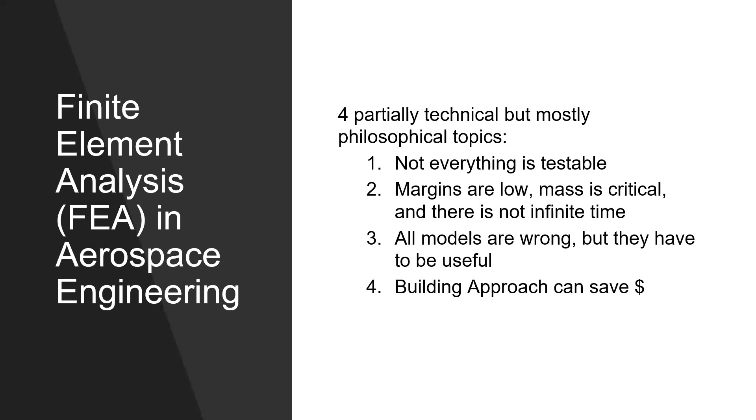So yeah, not everything's testable. Specifically, not all flight hardware is testable. So just running a quick thought experiment: if testing was incredibly cheap and fast, would we still use finite element analysis? I mean, it's a useful thing to think about because there's so many different cases.

If you think about a piece of primary structure on a launch vehicle, for example, or on an aircraft wing, and think about that piece of flight hardware throughout its entire life. You have manufacturing, you have transportation, you have flight cases, you have flying in rain, flying in hail, flying in Abu Dhabi, who knows? It's almost impossible to come up with a complete test campaign that looks exactly like everything you want to prove, including factors of safety and everything else that your regulators want to see in a test. Even if it was incredibly cheap and fast, it's almost impossible.

It's also generally true that physics always wins, and we can't always impose the right test like you fly conditions. So what do I mean by test like you fly? On the ground, you're not able to replicate every single thing that happens in flight. You have a test fixture that your hardware is attached to that is different than what you're flying to. You're not always able to apply hundreds of degrees to your flight hardware under load. So this is inherently a limitation that everyone faces.

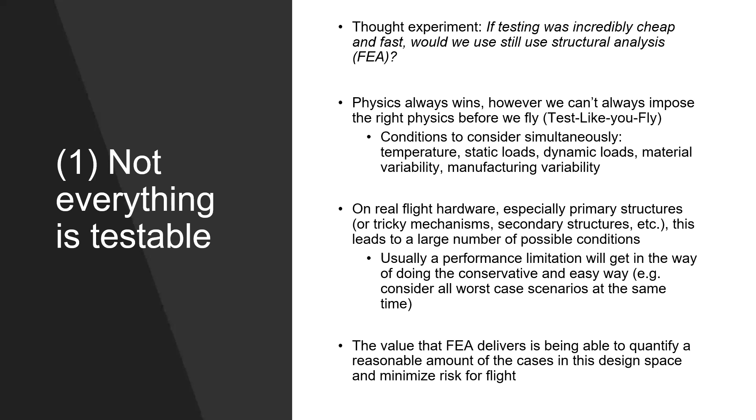Yeah, so following, not everything's testable. As I mentioned, if we had huge mass margins, we would just overcompensate with more material and make the part heavier and de-risk failure. But generally we can't do this. And even if we could, with really high mass margins, reality typically throws a lot of things in your direction, like lack of money, lack of time, especially schedules and cost always get in the way of actually making these things feasible. So FEA is generally the most economical way to make sure that the flight hardware is working.

Obviously, a really big exception here is flight hardware that requires super complicated analyses where it's difficult to ground models. My thrust chamber assembly is a decent one, though I would argue we kind of know how to do that. But I've worked on a few different designs. I don't know if anybody's familiar with the Falcon launch vehicle, the grid fin structure. That's extremely difficult. You have really weird aerodynamic loading, very high temperature gradients, and we didn't have a good way to get flight data back. So there's some scenarios where you want to tailor your risk posture and make sure you have the right approach, or you just decide to go test something to reduce risk.

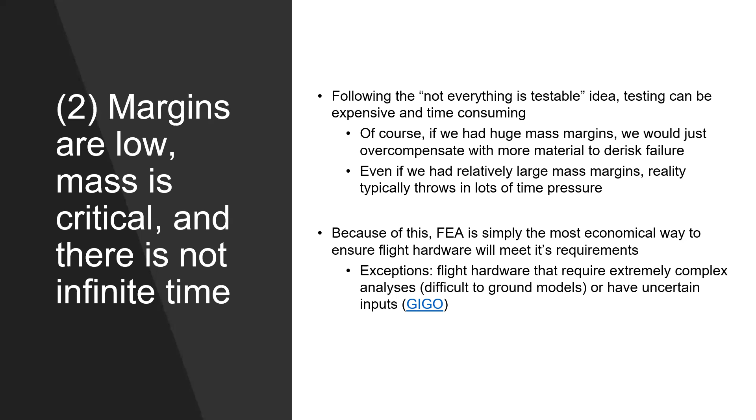Any other questions? And I think you're gonna talk about the building block approach, no? Yeah. Yeah.

So FEA is generally a useful thing in aerospace, no matter what you do. As a design engineer, you can just work a lot faster. As a stress engineer, it's your job. If you're a program or product lead, you're going to use this to de-risk flight hardware that your team's designing. So when I'm working with my team, I'll generally be asking for finite element analysis models to de-risk possible failure modes that I think are going to cause us problems in the future, or to optimize. And then as a systems engineer, this is crucial for your compliance deliverables. It might eliminate some testing you need for compliance later down the road.

And then there's some pretty cool things you can do with FEA, which I don't see used very often in my industry, like boots on the ground, except for R&D maybe. These are three pretty key ones. The second one is quite common: vehicle level dynamics models.

I don't know if you've talked about coupled loads analysis, if that's a topic here, Vinay. Do you talk about CLA at all in this class, or dynamics? No, but we did cover dynamics, and we just covered mass matrices and stiffness matrices. But you can take a minute to explain it. I think they'll enjoy that.

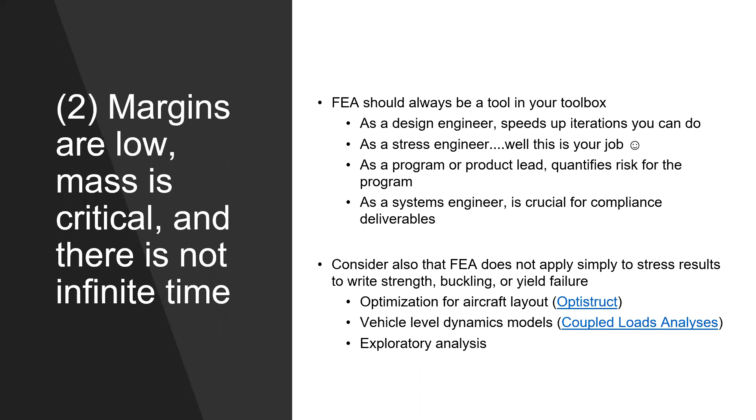Let me relate it to something we discussed in class. So remember, guys, when we discussed that if you run a very large model that's millions of degrees of freedom, it will take forever to run. So when he talks about simplified dynamic models, he's talking exactly about what we covered last week, which is you can take the main modes of the system and just come up with how much amplitude participates in each of those modes. And that simplifies it from millions of degrees of freedom to just a couple of amplitudes that get multiplied by these mode shapes, because every motion can be made up from those mode shapes times corresponding amplitudes, right?

So that's what the simplified thing means. Yeah, it's actually usually impossible to actually build a vehicle and make really big, complicated models. We just, due to time reasons, always have to simplify things. And that takes a lot of engineering judgment that goes beyond just using tools.

So coupled loads analysis, or if you're in my industry, you might hear CLA, is quite common. And then optimization for layouts. There's some really cool structural sizing tools around, which are great at this. OptiStruct is one. There's a few others that do something similar, where basically you design a structure and then it'll tell you, if I have a stiffened structure, what thicknesses my skin needs to be and the height of my stringers needs to be. It's really powerful stuff. It's things which actually make you a lot faster.

And then my last one's a favorite, exploratory analysis. If you're just not sure what the hell's going on with something, or you're curious about how something's working, making a simple model to tell you in which direction to be looking is actually pretty useful. I don't see that one done very often, but I do it myself quite a bit.

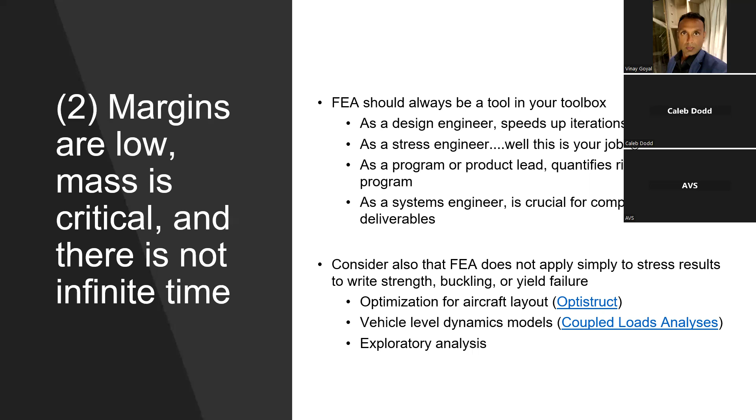Okay. Yeah, this is really important. All models are wrong, but they have to be useful. So it's kind of like, we wouldn't bother with FEA unless it provided some kind of measurable performance benefit. So this all comes down to grounding your models and making sure that you've had adequate peer review. I think Vinay was talking about this as I walked in.

I generally don't believe models unless they've had someone review them. You stare at this thing for hours and hours and you miss things. So have your buddy sitting next to you take a look at it, or have your manager review with you, and talk about how to make things a bit more open and transparent when you're building them.

This also causes a lot of major problems. I've seen a lot of models which haven't been peer reviewed, even by very smart people. Typically these are people who have a lot of confidence and don't want their models to be reviewed, and they have major mistakes, and that causes sometimes millions of dollars of rework that we have to do. So it's important at all levels.

And then, yeah, make sure you do testing on your models, even if you've gotten them peer reviewed and you think they're right. Make sure that in the end, before your stuff flies, if it's critical enough, your models are grounded.

What is the most common error that you've seen? I'll give you mine after you're done. In building models, heat transfer or finite elements or whatever. Yeah, I mean, in structural analysis, bad assumptions. Like I thought that this dome structure was 300 thou, but it's actually 100 thou, because they forgot to ask the person who owned the dome. It's generally little things like this. And then that propagates six months down the line, and all of a sudden it's like, oh, huge disconnect.

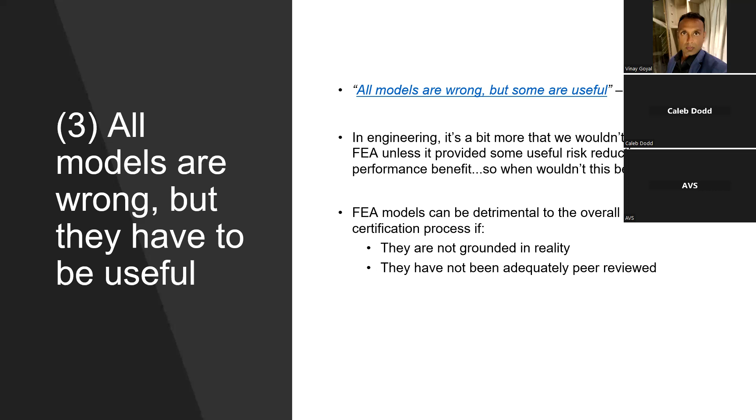Did that answer your question? Yeah.

Okay, so generally rules to follow in your finite element analysis models. Always be distrustful of your own results, especially if they look good. I can't tell you how many times I've made something which I thought was good and just moved forward with it, only to go back and look at it 2 weeks later and it's completely wrong. So hand calcs, peer review, and sensitivity analysis are pretty useful techniques there.

Follow a checklist or make your own. System 1 versus system 2: it's like your fast versus slow method of thinking, really slow down and try and be deliberate about the steps you're following. I'll talk about the building block in a second. And then the last point we've touched on several times already.

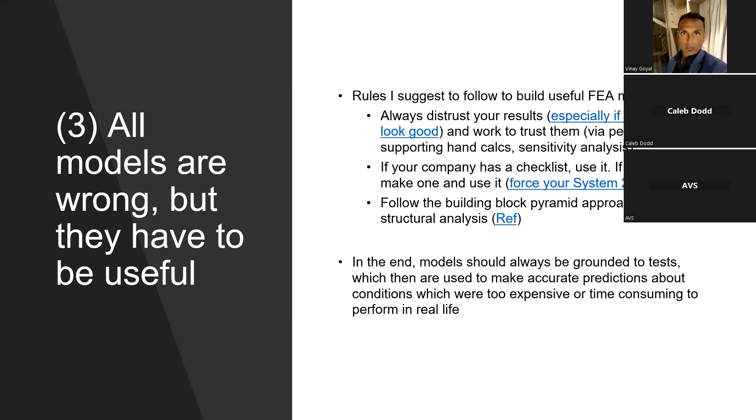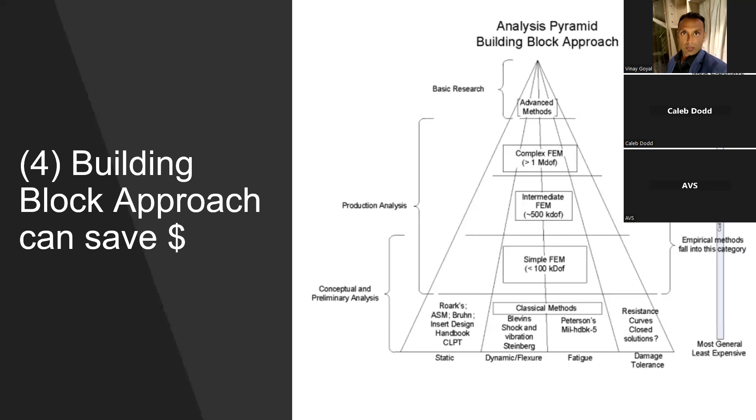What was the process like getting a job internationally? Oh, that was an interesting one. The question is, what was the process for getting a job internationally? So how I ended up there was I knew someone at Boeing who ended up in Munich working for this electric aircraft company. And I thought it would be fun to live in Munich for a few years, which was one of the main reasons I took that job. It was a really cool experience.

Getting the job, actually, there's a lot of companies in Europe now, engineering companies specifically, who are trying to hire English speaking candidates, and they make it pretty easy. You've got to get a visa. You've got to be kind of far from your family in the US, depending on whether that's good or bad. So yeah, it was not so bad. It was a good experience. I'd highly recommend it.

Kind of the same note, if I'm an international student, I can do aerospace stuff in the US. Is there any other place that you would recommend looking into? Any other countries? So let's take that question after class, that one specifically. I have my reasons. Okay.